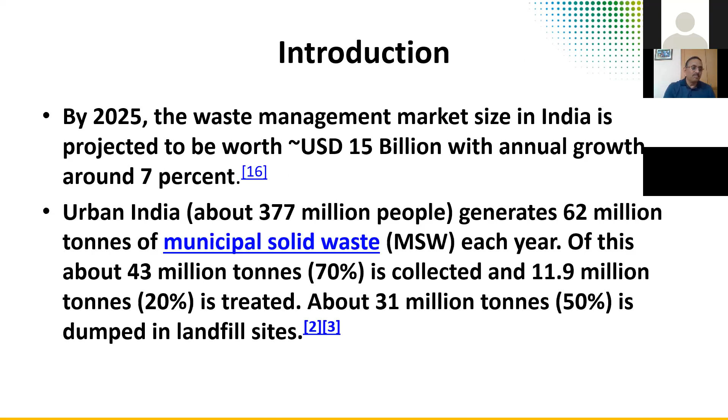Urban India, with about 37 crores or 377 million population, generates 62 million tons of municipal solid waste (MSW). Of this, about 43 million tons is collected and only 11.9 million tons is treated, meaning the balance of 19 million tons is left on the roads. Even of the collected waste, only 20% is being treated now, and about 31 million tons is dumped in landfill sites. This is a very alarming number for all of us to ponder today.

It is estimated that India generated almost 2 million tons of e-waste - I'm talking about e-waste, which is educated people's waste - in 2016, approximately 1.5 kg per capita. This is going to exceed other solid waste in urban areas. It's estimated that in 2020 it was 4.5 kg - we've grown threefold in e-waste in 4 years, so about 5 million tons of e-waste is going to be generated this year.

So do civil engineers have to know this topic? This is a question students always laugh at me about. I had 4 topics of summer internship to offer students, and I'll be sharing that today.

One is 'CLEAN' - Colony Level Environment Assessment and Neutralization, that's my acronym - and C&D waste management.

Another topic is function halls. We all attend functions, though not in the last 4 months, and maybe not for another 4 months. But if you've had any experience attending functions anywhere, you can see the condition starting from parking and fire hazards, to solid waste management and sewage, because they don't provide proper facilities. Suddenly there will be 1,000 people coming, eating, and generating a lot of waste, and function hall managements very rarely have treatment facilities at that point. So I thought I'd work on a startup idea of mobile treatment plants. I offered this topic to students, and they felt, what is this waste?

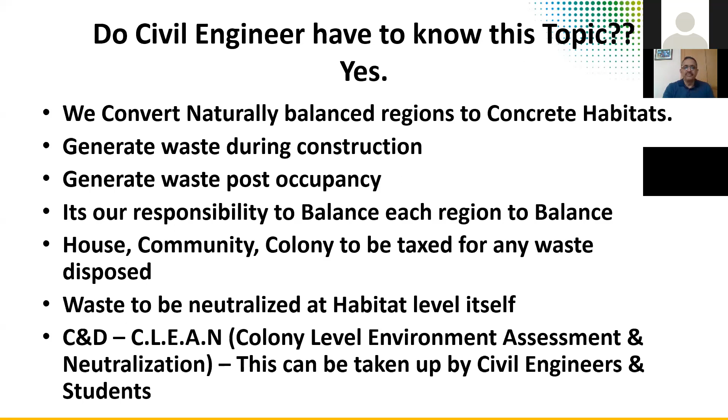So my concept is waste should be neutralized at habitat level. This is my pure concept. I'm working on it. I need students, I need researchers to work on these ideas which we have on construction and demolition waste, and clean, that is colony level environment assessment and neutralization. And this can be taken up by civil engineers, and a lot of startups can happen by civil engineers in this waste management.

Imagine the plight of the people living in this, and I am very sorry for this. And the next level is we dispose all this sewage into the canals, rivers, nalas, untreated. And then we spend huge money. Hyderabad city itself has a budget plan of about 20,000 crores to do city level sewage treatment. We were dumping sewage into Hussain Sagar Lake, and then we are spending huge money to treat this sewage before dumping. And we design huge projects, spending thousands of crores.

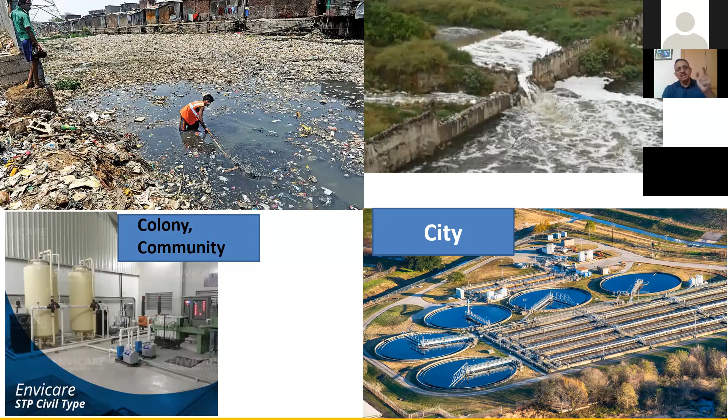We dump everything as solid waste, and we complain the municipality is not collecting my waste. Are you paying any special tax for additional waste that you are generating? Why don't the government come up with a legislation that taxes every waste collected? It should be more than the buying itself. Then only will people think twice, just like when they charge you for the plastic polythene bag you buy at the hypermart or provision store. Same way, waste also, when you dispose it, should be taxed. This is my proposal to the government.

Solid waste management is also like this. We are going for landfills instead of collecting in an organized manner. At least, if not so much classification, we can segregate dry waste - paper, glass, plastic, and metal - and wet waste, biologically degradable organic waste, which in layman's language is wet waste.

And then you can recycle at the colony level itself - why do you need vans for carrying all this? You can treat it there. Imagine the data on every municipal corporation or panchayat spending every month on transportation of this solid waste, whereas this can be treated at plasma gasification plants, pyrolysis, and biomethanization. For power generation you can use it, and inert waste can be taken to the crusher to make cakes for reuse. All this is possible actually.

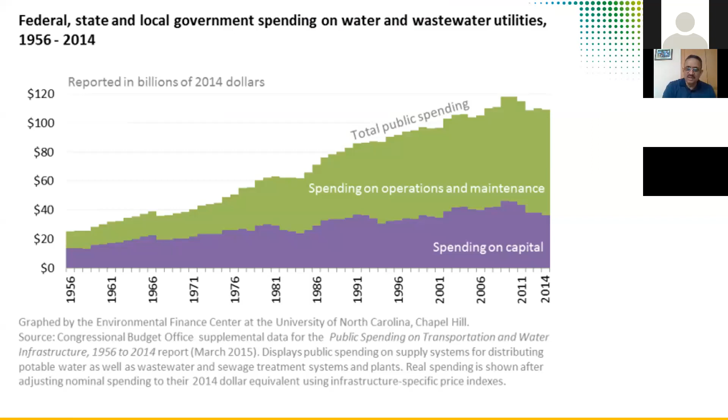We have to think about it and see whether we want to spare some 2% of our individual home or community level land to manage this waste locally, or we will be continuously killing - in other words, in future, the waste will be dumped on our heads. So this is the theme of my talk today.

Of course, we also learn the treatment methods and all, but treat and zero disposal - that is ideal but also sustainable. Ideal meaning it is difficult, but we should be attempting to reach the zero disposal stage in the design of every individual home, community, colony or layout. And it is a culture actually - waste management is a culture, and it is a commitment of engineers, and needs a legal framework to enforce it. So we all can work for it.

Otherwise, we are seeing the pandemics. Imagine living near those sewage rivers and sewage canals and landfills in Hyderabad. Many people should know Jawahar Nagar, which is a landfill area - acres of land, 20 acres, 30 acres, being filled. Disasters with population growth and urbanization.

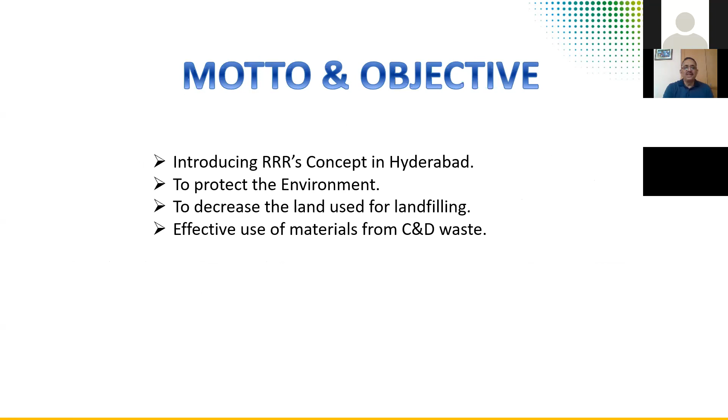So this is our awareness as engineers - this is the C&D waste management project. I got it done by a student to protect the environment, to decrease the land used for landfilling, effective use of materials from C&D waste, and building roads and bridges construction.

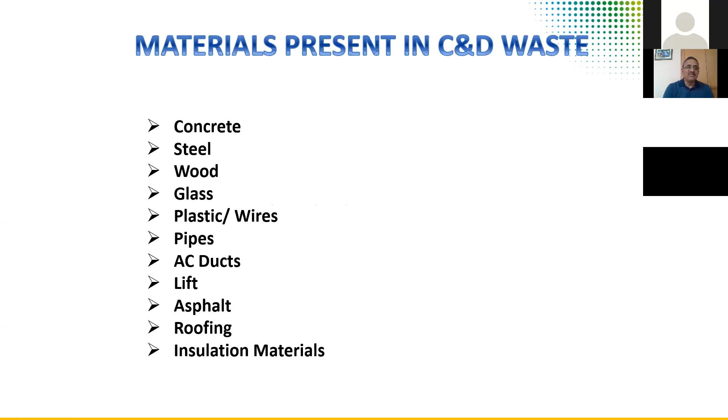We are seeing how much waste, demolition waste, is generated from removal of existing structures built over a range of time periods - old structures. Site clearance also comes under construction and demolition waste, along with excavated soils. Materials present in C&D, mainly from demolition, include concrete, steel, wood, glass, plastic, wires, AC ducts, lifts, asphalt, roofing, and insulation materials, etc.

So we should have the strategy of avoiding and minimizing waste, recycling it, or treating it, and finally disposing only the minimum amount.

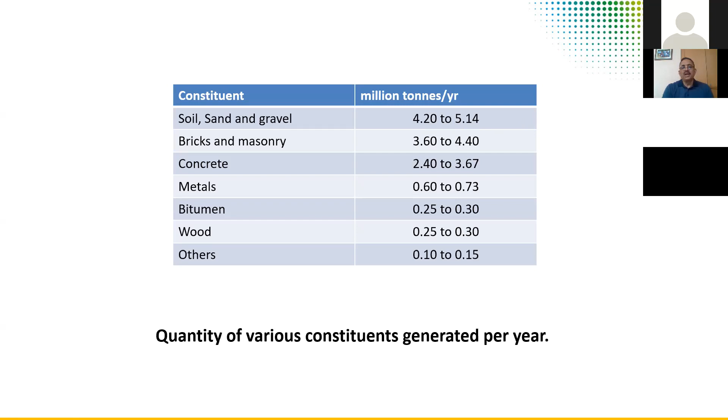Soil, sand, and gravel generated in Hyderabad is about 4.2 million tons per year. Bricks and masonry is 3.6, concrete is 2.4 million. Metals like steel and window frames are 0.6 million. Bitumen is 0.25 million, wood is 0.25 million tons, and others are 0.1 million. This is the breakup of C&D waste generated.

Different constituents, percentage-wise, show concrete as a major component, and brick masonry is also major - together making up 50%. Soil and sand can be reused for subgrade filling of roads, so we won't discuss that further. About 55% can be recycled or reused in various applications.

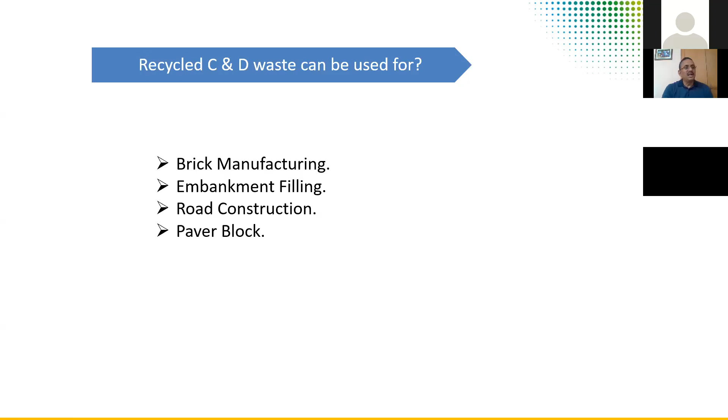A study was done proposing C&D waste recycling plants, where waste can be converted into aggregates or mortars and reused. Applications include brick manufacturing, embankment filling, road construction, or paver blocks. Door frames can be reused, brick concrete can be recycled on site as fill sub-base material, and paint can be remixed and used in garages or storage areas.

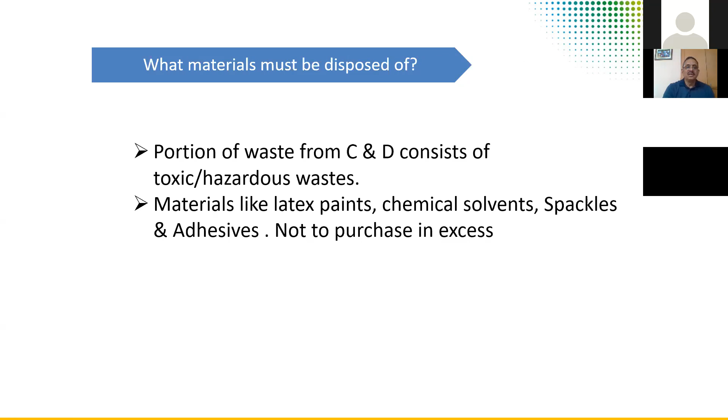A portion of waste from C&D consists of toxic hazardous materials like latex paints, chemical solvents, and spackles - these should not be purchased in excess. They can be reused, recycled, used as replacement for sand and cement as per code, for filling, and are cheaper to buy.

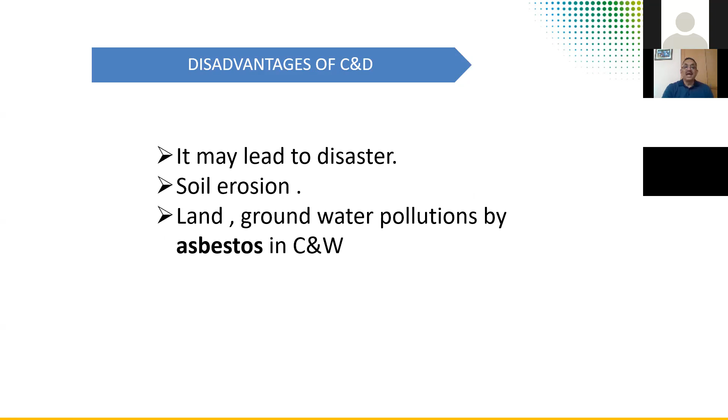Otherwise, it may lead to disaster - soil erosion, land and ground water pollution by asbestos in C&D waste is quite possible. We need recycling plants, awareness programs, code approval, a ban on landfilling, and encouragement of recycled materials in the market, as this is also part of the green norm.

If you have recycled content - for example, Armstrong - it was a surprise to me about 15 years back when I learned that Armstrong false ceiling material uses recycled content. It looks so good and is such a great brand. Any material we buy in construction, we should check the recycled content in it.

Construction waste disposal should be included in the EIA. So they did a survey with about 20 interns and 3 core members, covering zones like Uppal, LB Nagar, Bachupally, Mehdipatnam, and Kukatpally, surveying demolition buildings, building types, and so on.

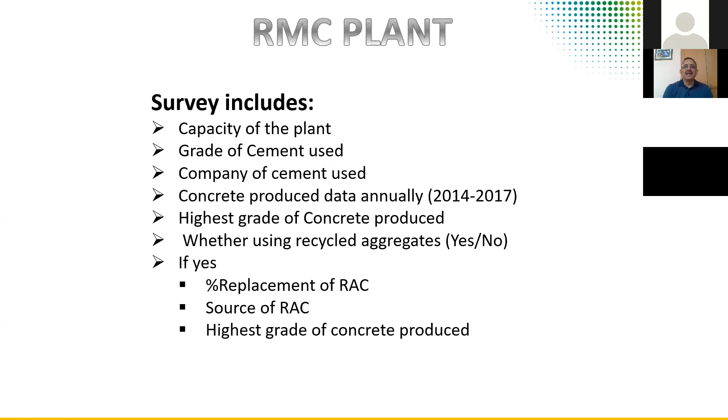We did the survey - concrete produced data annually from 14 to 17. They visited 40 contractors, 250 C&D sites, 40 construction sites, and 250 demolition sites. They also visited 27 RMC plants and collected data - plinth area of demolition is about 90,000 square feet, and average area of construction is 700.

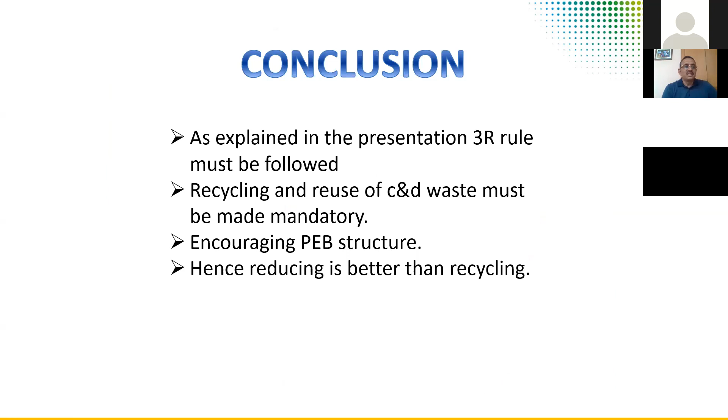They worked out how to balance construction materials from demolition materials - it's a very interesting study. These are all the demolitions they have done. A 3R rule must be followed: reduce, recycle, and reuse. Encouraging pre-engineered structures like precast and steel structures will drastically reduce waste during construction.

That's in developed countries. In India, about 61,000 MLD of wastewater is generated daily, of which Hyderabad alone generates 1,100 MLD, disposed into the Musi River, out of which only 750 MLD is treated. That means we are disposing 350 MLD of sewage into rivers, lakes, and so on. This requires a lot of work by engineers and students to bring awareness about this.

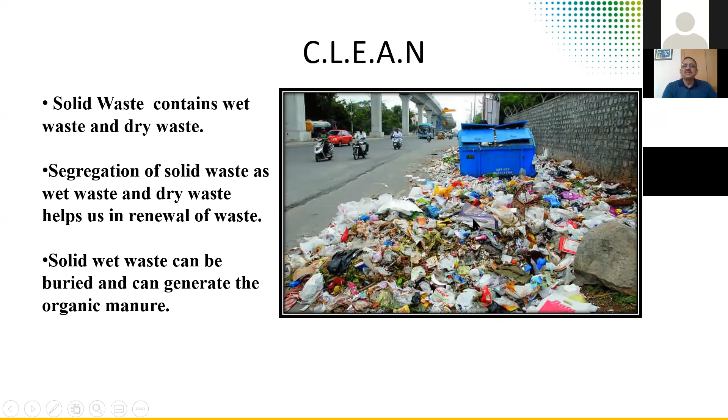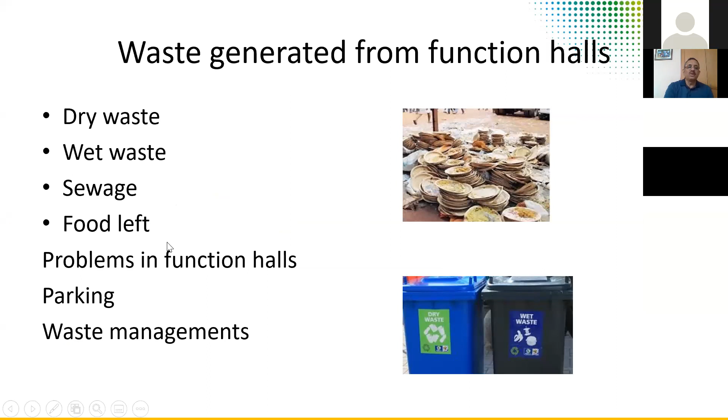Next is the function halls. As I said, this is the third internship program they have done, and they collected data from the function halls on solid waste, wet waste, dry waste, and food left, and surveyed all this.

Why I'm telling you this is most of you should encourage students to work in every city in India on this local level waste management. In fact, by doing this, civil engineers will be branded as responsible citizens. So we should do this, and we get to know the quantity of waste.

And this is the proposal: a mobile waste digester sewage system, a mobile organic waste management system, and a parking solution. These are the three solutions they have come up with for function halls, based on what they studied.

So as a company, as a consultant, in my opinion, let's not think that the job of sewage treatment is somebody else's job, or effluent treatment is somebody else's job. As consultants, as civil engineers, we should know about these processes available, about the methods of treatment possible for every project we do, and then try to implement this system.

In Tamil Nadu, we did a project, as I said, a combined effluent treatment plant, and almost every industrial project, about 100 projects, we did the design of ETPs. And in residential projects, even a 50-flat project, we implemented STP and solid waste management.

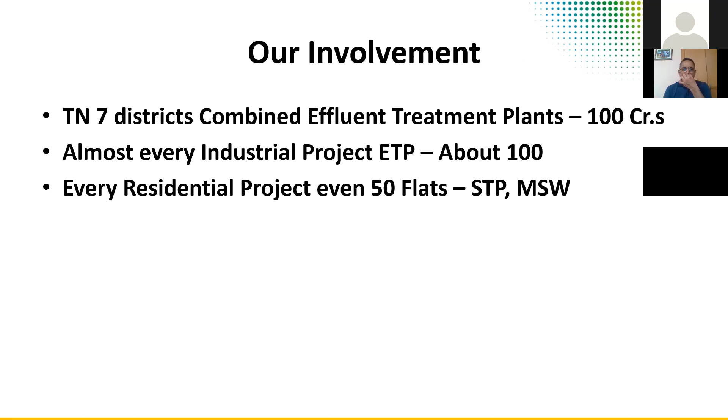That means almost 60% of the water we use, out of the 150 or 200 liters per capita per day, is used for flushing, landscaping, and such applications, so you can use recycled water for that. This reduces that much disposal into the sewer lines, the main sewer lines.

And the waste management collection - now we are into the real topic of management. We have to plan the collection of waste, whether it's sewage or solid waste, then transportation of the waste, and then treatment of the waste.

For collection, there are various methods like combined collection of wet and dry waste. It's always better - in fact Hyderabad, Greater Hyderabad Corporation is encouraging segregation at the source level itself. That is a must, otherwise we'll be spending huge amounts on transportation and all that.

Once you segregate, you can convert your own wet waste into organic manure. You create a small pit at your home, keep dumping your organic waste, and once a month you get manure to use for terrace gardening. This reduces that much disposal.

And that is the most hazardous - organic waste generates a lot of mosquitoes and a lot of bacterial infections. So it is always better to treat it at the house level itself.

Next is the transportation. There are different methods of transportation: pressurized transportation of sewage, vacuum methods. Then treatment - we have pre-treatment, preliminary treatment, primary treatment, secondary treatment, and sludge disposal methods, biosolids.

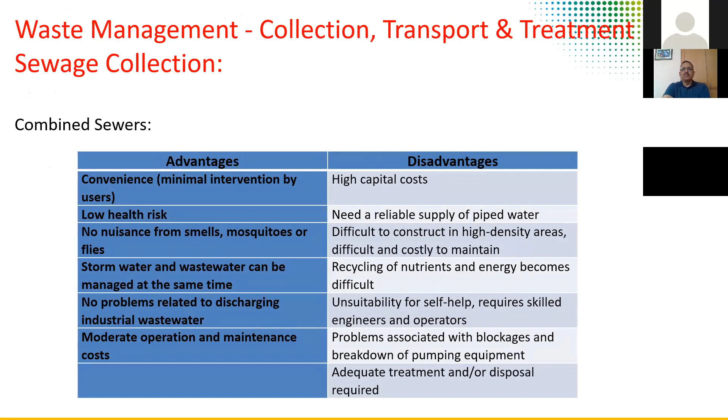So separate sewers are designed to convey wastewater and stormwater in separate pipes. This is always better, in fact I suggest this - I covered this in the water topic too. At every house level, you collect your terrace water and store it so you don't dispose it into the storm drain. What we are doing currently is combining stormwater and sewage, and treating all that volume together.

So it's very important that you can retrofit these colonies and educate the colony people about the advantages of collecting water at the colony level, and treatment of sewage at the colony level.

So sanitary sewer systems may also collect wet weather flow via illicit connections - this is a problem from house drains or storm sewers, as well as through defects in pipes and manholes. This is a big problem we have to solve. There's a huge requirement to audit these stormwater lines and sewer lines, and we should suggest methods to restore them to the proper system.

Surface runoff, grey water and black water can be managed separately, with limited or no risk of sewage overflow. This should be minimized. Once you plan at the house level, compact STPs are available, even 1,000 liter capacity sewage STPs, so you can buy and install at your home and not dispose any sewage out.

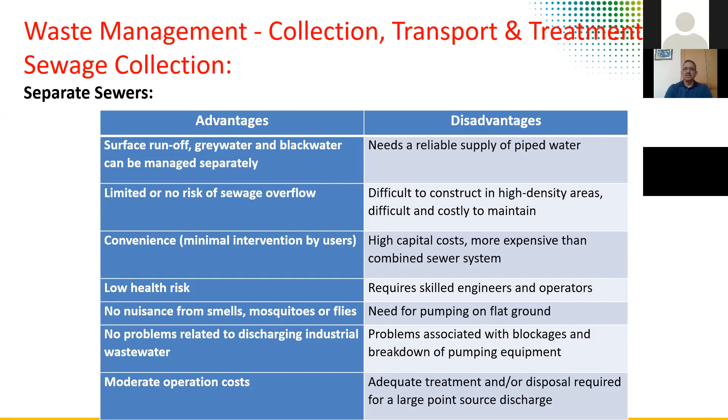When designing an individual house, also encourage them to have an STP and stormwater collection, and it will be a very sustainable house, with low health risk and no nuisance from smell, mosquitoes and flies, no problems related to discharging industrial wastewater, and moderate operation cost. These are the advantages of separate sewers.

Pressurized sewers, we are pumping the waste instead of using gravity to transport wastewater. This is another waste actually. Waste disposal itself is an unnecessary cost. We can minimize it, but again you pump it, you spend energy for it. So it's very negative actually.

The system can be built with only shallow trenches and relatively small diameter pipes. It is an effective solution where conventional systems are impractical, such as hilly areas and rising slopes. But we always have to plan gravity sewers, that is always better. Pressurized sewers, for effective wastewater transportation, need expert design, a permanent energy source for pumps and sludge pumps, and have high capital cost and require skilled engineering operations.

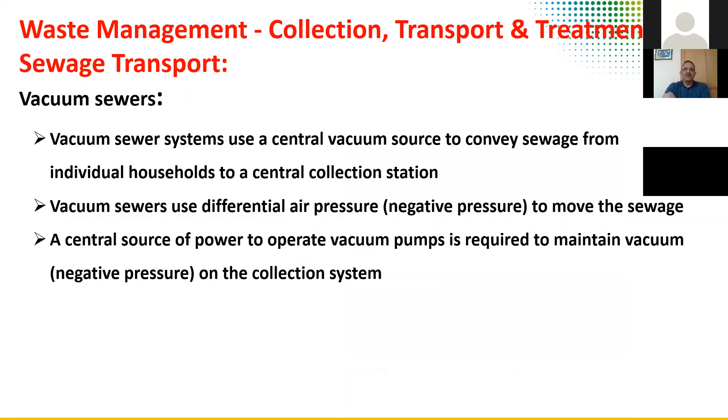Vacuum sewers are much more costly, they convey sewage from individual households to a central collection station. This is a very costly affair, requiring expert design and very high capital cost. We should not even think of this in Indian conditions.

For sewage treatment, we have effluent treatment and solid waste and hazardous waste treatment. We have anaerobic systems and aerobic systems, activated sludge process, which we all studied already. I don't want to spend much time explaining, but we should know about the moving bed biofilm reactor, MBBR technology, sequential batch reactor, and fluidized aerobic bioreactors.

MBBR technology has the advantage of less equalization and fewer chambers. Activated sludge is a conventional technology where we need to use ponds, oxidation ponds and all that. Fluidized aerobic reactors can go up to 200 KLD, for smaller capacities you can use this, and rotating biological contactors are very small units, you can do FRP with FRP containers and the least number of chambers.

In anaerobic systems, you have biodigesters with no pump rooms, least power, and you only pump the treated water, this is DRDO patented. We should use this at individual community levels. Biosanitizers are bacterial based, these are very advanced systems, this is biotechnology, you can develop bacteria that can neutralize your waste.

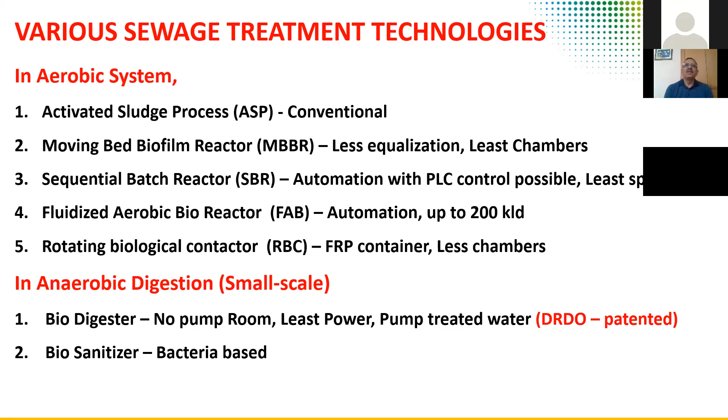These are all possible things, and we are building 700 MLD capacity sewage treatment plants in the city. So we have the bar screen chamber, oil grease trap. We should know the components: equalization tank, activated sludge processor, aeration tank, then the sludge holding tank where we remove and hold the sludge, and the settling tank, filtered water tank, and treated water tank. This is the process block diagram.

Regarding nature of waste, general quality of sewage inlet characteristics: say 300, that means 3 lakh liters per day, for example, and pH value is 7.5 to 8.5. We should always collect data on input waste characteristics, because our design basis depends on the input characteristics of the sewage, and then we target the output characteristics and design the sewage treatment accordingly.

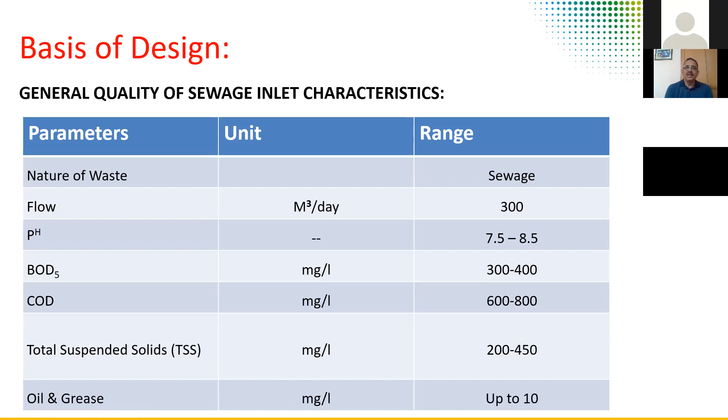BOD5 is 300 to 400, COD is 600 to 800, and total suspended solids is 200 to 450, oil and grease is up to 10. The targeted quality of treated water is pH 6.5 to 7.5, BOD should be less than 10, COD less than 100, suspended solids less than 50, oil and grease less than 5, and reuse is the parameter - we should be able to reuse the treated water.

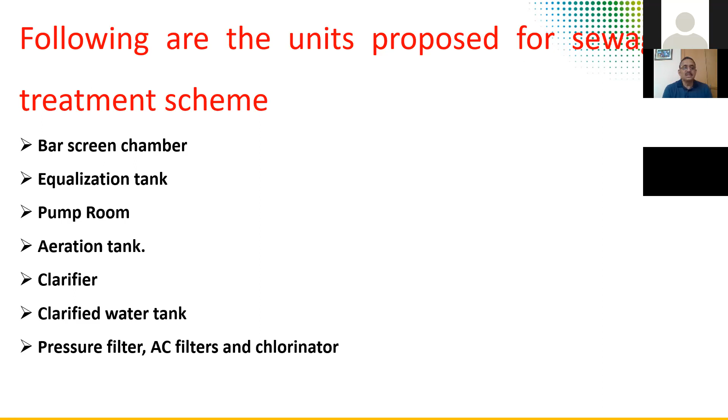For this, you can have a bar screen chamber, equalization tank, pump room, aeration tank, clarifier, and clarified water tank, and pressurized pressure filters. You can have pressure filters or sand filters, the old conventional method was sand filters, but now we are using pressurized filters and chlorinators.

Final tank, sludge holding tank, piping and cabling, and unit design. The important wastewater contaminants are suspended solids, biodegradable organic waste, pathogens, nutrients, and refractory organics.

So biochemical oxygen demand and chemical oxygen demand, and total suspended solids and pH. BOD is an important measure of water. It is a measure of the amount of oxygen needed by bacteria and other organisms. That's why we see the oxidation ponds.

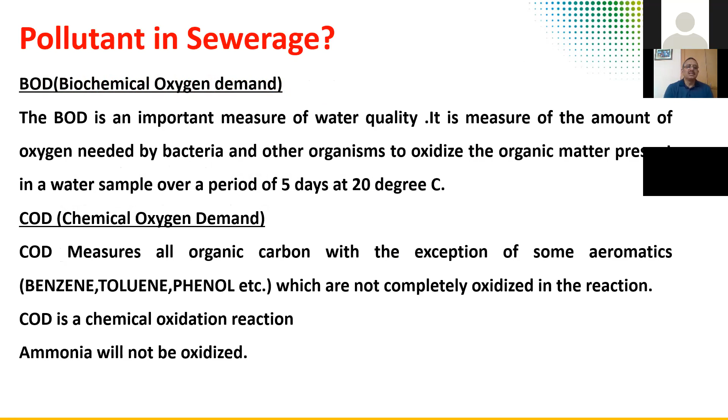And COD is organic carbon, with the exception of some benzene and others which are not completely oxidized in the reaction. So COD is a chemical oxidation reaction, and ammonia we cannot oxidize.

That's why, in a good design, you should not allow detergents to be used in bathrooms or mixed into the sewage. Otherwise the treatment will be very difficult and you cannot get good quality water. What should be done is you should encourage the community to wash separately, then treat or dispose of that water separately so that the other sewage can be treated.

In developed countries, even 20 years back, I have seen it is a compulsion actually. Nobody can dispose detergent water into the normal sewage. So this is a very important point every engineer should note and try to implement in their projects.

So standards of treated sewage, raw sewage and treated sewage, after secondary treatment and after tertiary treatment. And oil, grease, after secondary treatment - public sewer level pH is 5.5 to 9.

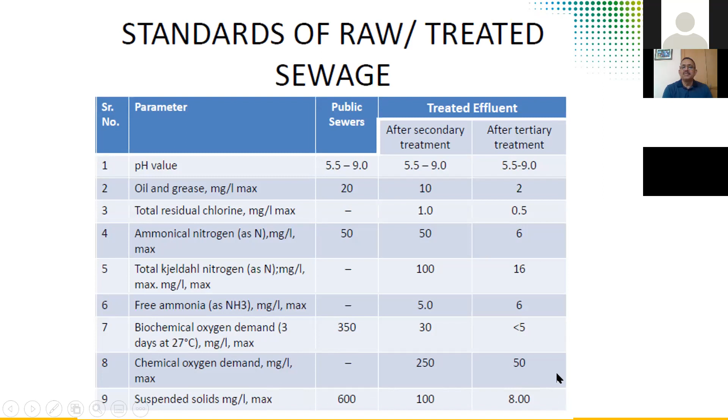Oil and grease is 20. Ammonical nitrogen is 50. Biochemical oxygen demand, BOD, is 350. Suspended solids is 600. And after tertiary treatment, it will be brought down to 8. These are the parameters.

In screening, you have removal of coarse solids, and types of screens are fine, medium, and coarse, with cleaning done manually or mechanically. The benefit is protection of pumps by screening. Coarse screening is 20mm clear spacing in bars, and fine screening is 6mm.

In aerobic, we have MBBR and SBR systems. In anaerobic sewage treatment, in the absence of oxygen, no aerator blowers are required, but there is foul smell during the treatment. So these are all the activated sludge process, a very conventional method.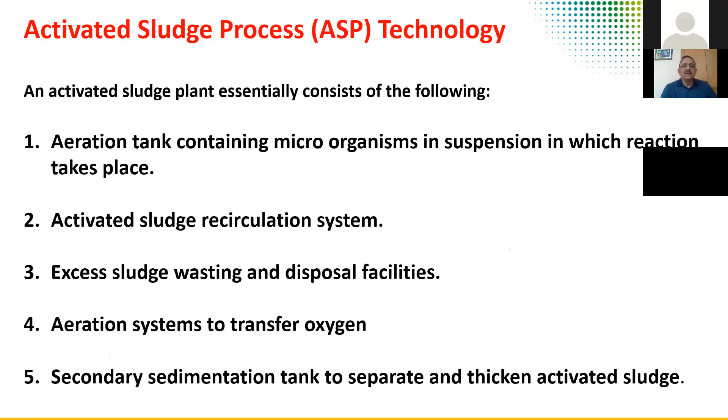Advantages are seasonal variations can be sustained. Disadvantages are high energy consumption, foaming will be there, and it requires elaborate sludge digestion and more land than SBR and MBBR. Nitrogen and phosphorus removal requires additional anoxic tanks and three times internal recirculation.

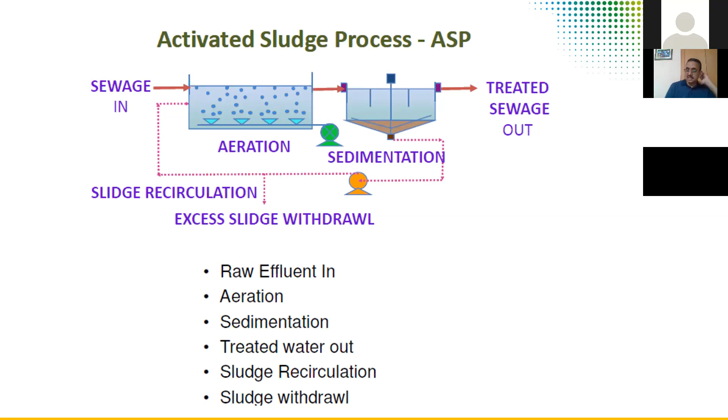So this is the aeration and sedimentation process. It's simple, but it requires a huge area for aeration tanks, large aeration tank. So this is the process for ASP.

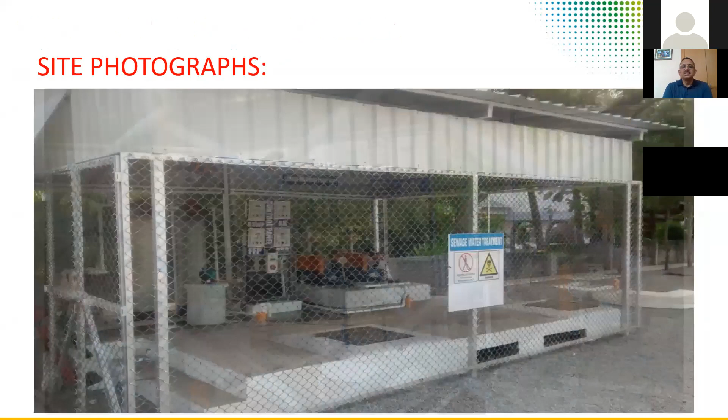And these are the drawings for activated sludge process, where large tanks will be required. This is like conventional septic tanks almost. And these are photographs of compact units, with site photographs of these compact units as well.

So in MBBR, we have this based on the biofilm organized and developed on carrier elements. The media is floating in the aeration tank and kept floating by air diffusers. So this is the flow diagram.

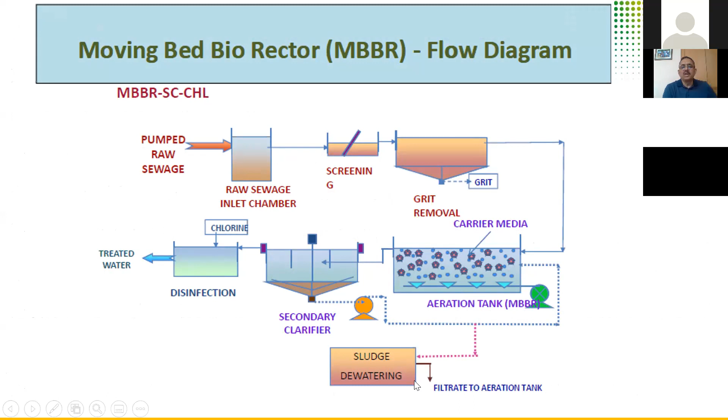We have raw sewage screening and grit removal, which is common. Then we have the aeration tanks where you have the carrier media which will be digesting, and then the secondary clarifier, disinfection, and treated water sent out, with sludge dewatering and sludge cakes taken out. So this is the drawing of one proposed project we did.

MBBR technology - and this is the maintenance and operating area. This is all what we do. We think civil engineers have to do only this structure, but we have to do engineering of the waste also, actually. We can do wonders if we apply our mind, if we apply our knowledge - definitely we can do wonders.

So let us involve, don't leave it to the vendors, because vendors try to sell their technology. We should know the advantages and optimization of various technologies for our given project. It is not a common characteristic of all the waste in every project we do - for an office building it is different, for residential it is different, commercial it is different. So we have to prepare the design basis report for each of these characters, and for the targeted one, only spend on the required technology.

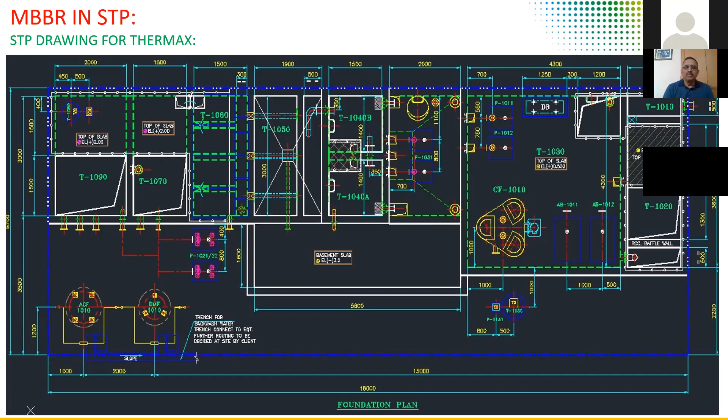So this is from another vendor, the technology of MBBR. This is the drawing for the process for the given capacity and characteristics. These are photographs of different implemented projects. We should try to make this very clean and environmentally friendly. This is a most neglected area, but we should keep it proper.

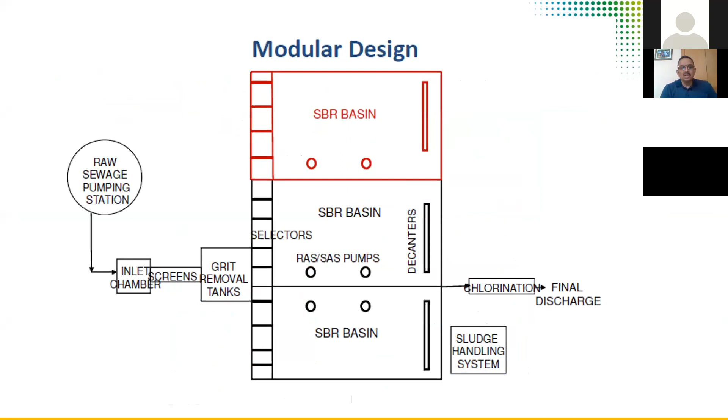And a sequential batch reactor, this is SBR technology, and de-gritted sewage is fed into the SBR basins for biological treatment to remove BOD, COD, and suspended solids. So this is the SBR technology, we use this technology also, and this is the SBR process.

Fill and start aeration, then stop aeration, then start settling, then start decanting, then stop decanting and send it for recycling. So it can be fully automatic in SBR, a cyclic activated sludge process until you achieve the targeted result, and it can be compact because you don't have to spread the whole thing.

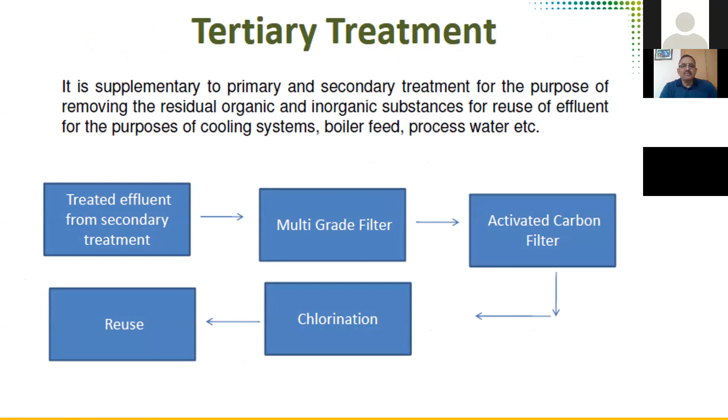So we have multi-grade filters, activated carbon filters, chlorination, and reuse. Next is the aerobic bioreactors, fluidized aerobic bioreactors, FAB technology.

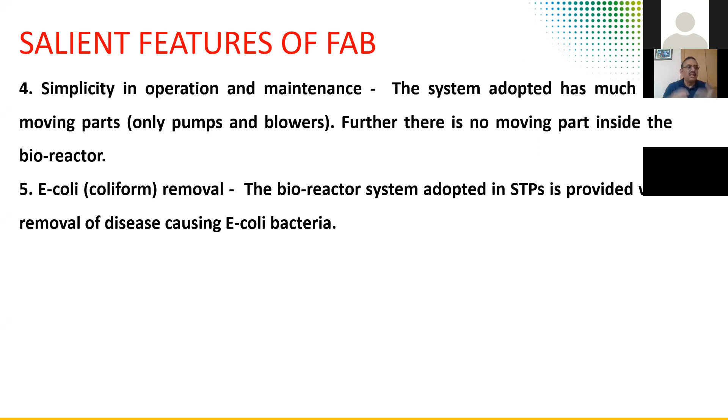We should know about this and compare whenever we suggest any technology - first its capacity, space, and value engineering we have to do. What is its capacity and what is the space required? What is the cost, what is the operating cost? We have to evaluate the overall cost and visit some installed plants of the vendor, assess the vendor, and then only suggest the proposed treatment.

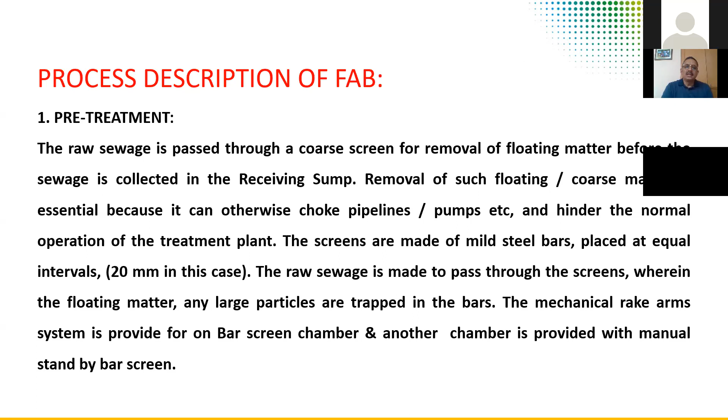So the process description is: pre-treatment, biological treatment, and tertiary treatment. In pre-treatment we remove matter - raw sewage is passed through coarse screen chambers and floating matter is removed, and then sent for biological treatment, and then tertiary treatment finally.

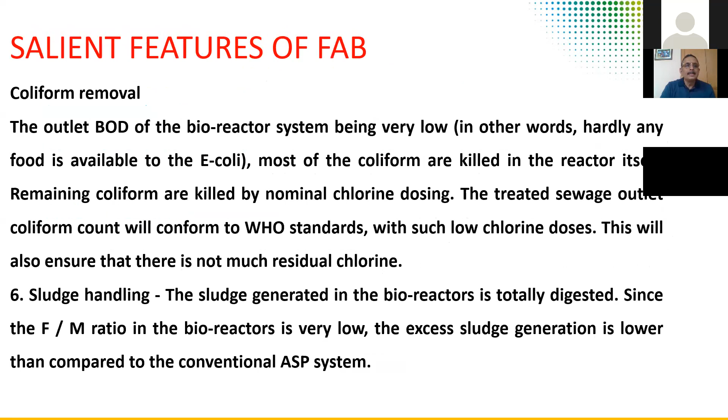And advantages of this - sorry, we missed something. Yeah, these are the salient features of FAB technology: small space requirement, compact units, but it has a limitation of 200 KLD. That means small communities can use this, not for large city level treatment plants.

So this is the FAB technology, and we have this rotating biological contactor, an inbuilt complete single packaged unit. This is for house level, small units, very less noise and no stinking. Because it's a compact unit, the entire package can be transported. It can be used for up to 500 liters or 1000 liters capacity, and you can move it - the system can be easily upgraded from one capacity to another by adding compact units, and it has low operation and maintenance cost.

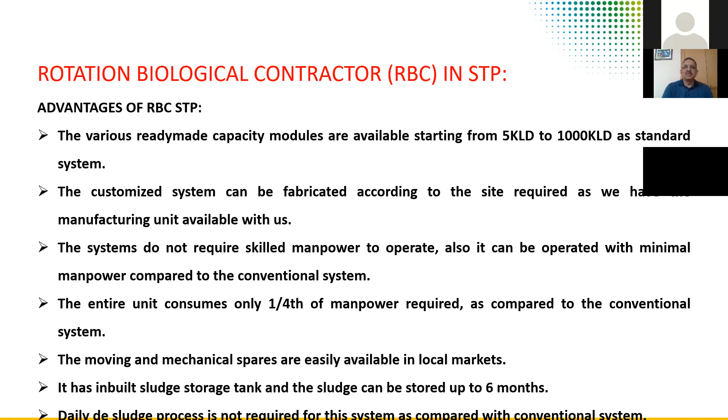And it can be in FRP tanks, with ready-made capacity modules - 5 KLD, as low as 5,000 liters, up to 1,000 KLD, which is 1 million liters, 1 MLD. So even a small 5,000 liters we can use for this RBC technology. This is the latest small unit available in the market, and it will have a secondary clarifier.

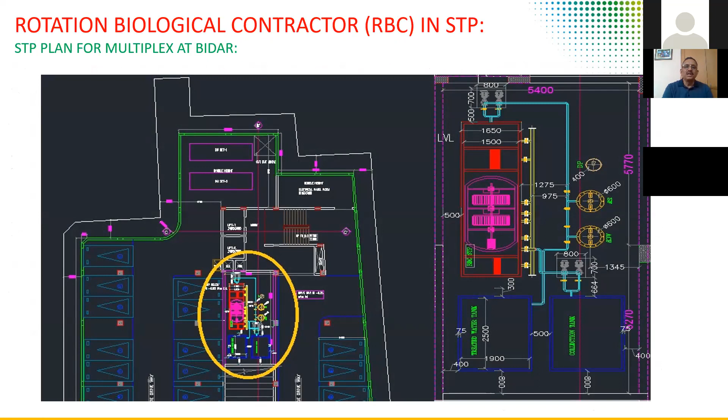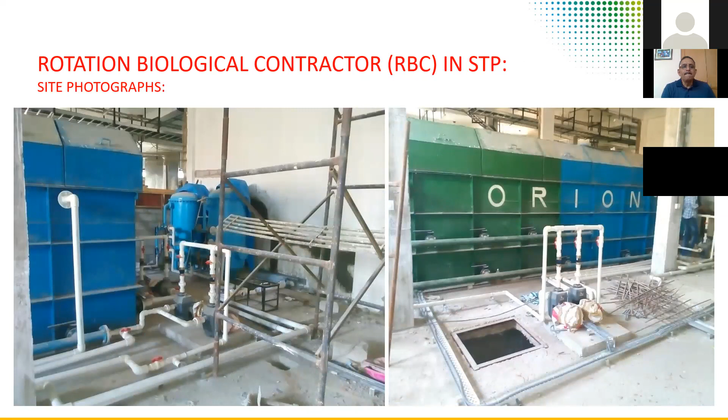We designed this small RBC unit in a multiplex theater - size is 2.5 meters by 1.7 meters and 5.5 meters. This is the photograph of the installed RBC, very clean and simple. So these are photographs of RBC. We should encourage these small units in small communities.

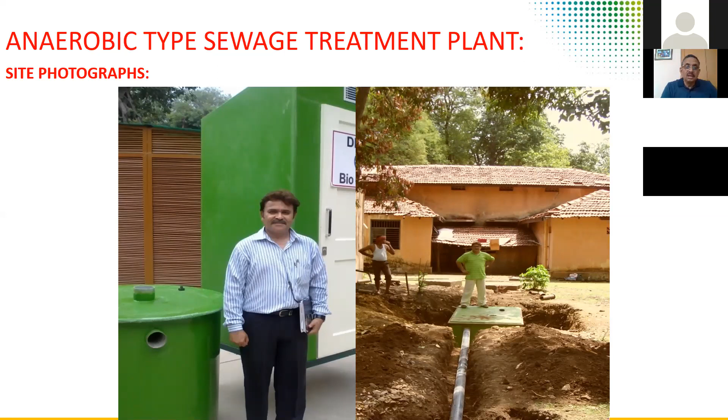And this is a biodigester, an anaerobic type sewage treatment plant. This is DRDO technology, being used for toilets in Swachh Bharat Abhiyan, at the toilet level. Biodigesters are very local, used at every level, and no power is required and almost no maintenance.

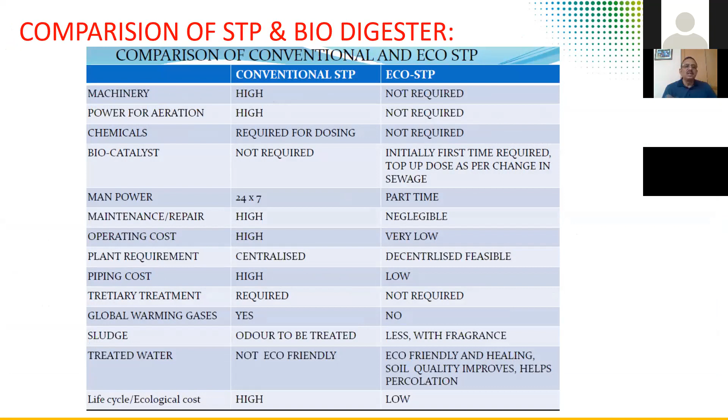So no machinery and power for aeration is required, and chemicals and biocatalyst are not required. Initially it is required the first time because you have to initiate it, but the only thing is it has to be continuous - these biodigesters cannot be stopped and restarted after 2 days. So you should plan such that it will not be stopped.

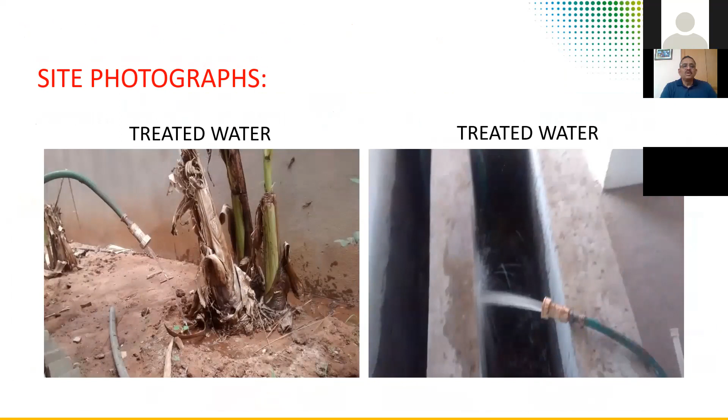Once it is stopped, you have to feed it again, like after antibiotics we use this powder. So the treated water can be used for plantation and recycling, and these are photographs of the biodigester systems.

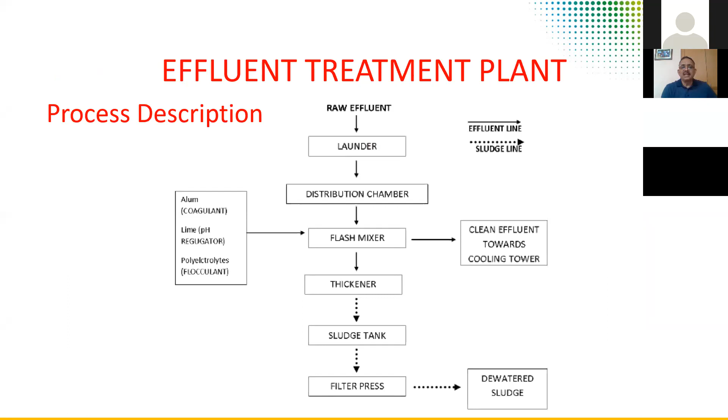Next is the effluent treatment plant. There is huge work here, many slides to cover. We all know industrial wastewater. Depending on the process generating it, we have to collect the characteristics of the raw effluent and plan the treatment and distribution chambers, flash mixers, thickeners, sludge tank, and filter press. These are all the processes.

I'll run a bit fast. So we have pre-treatment with fat and grease removal, primary treatment, secondary treatment, tertiary treatment, activated sludge, and treatment methods like physical unit operations, screening, flow equalization, sedimentation, aeration, pH control, and chemical coagulation. pH control is very important in effluent because it can be highly acidic or basic.

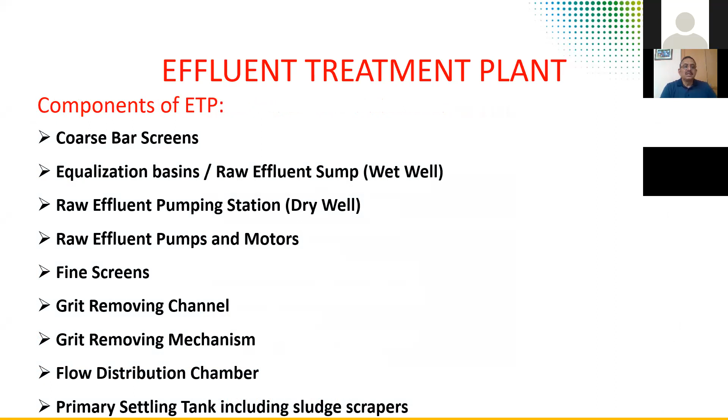So we have coarse bar screens, equalization basins, raw effluent pumping stations, and components of the ETP include primary sludge sumps, primary sludge pumping stations, secondary settling tanks, secondary sludge pumps, and raw effluent pumping.

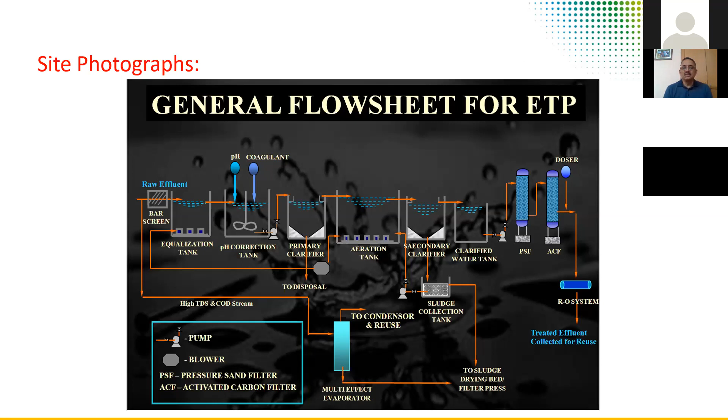There will be so many steps. We have to study these technologies for various processes, estimate the civil cost and the process cost. Some vendors' capital equipment may be lower cost, but the civil cost will be higher. So we have to take the data, work out the overall cost of installation, and only then recommend a particular vendor.

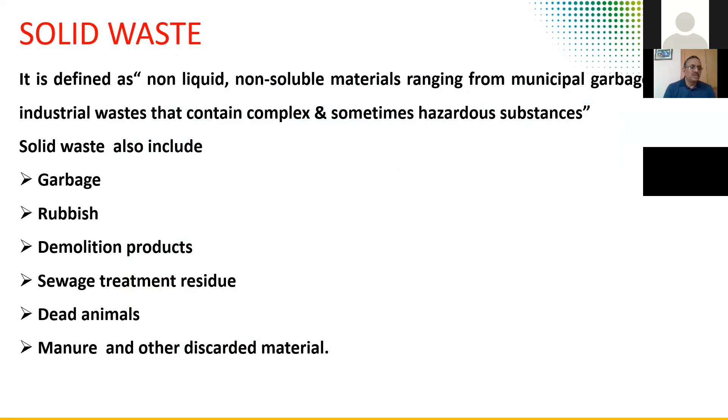Next is solid waste management: non-liquid, non-soluble materials ranging from municipal garbage to industrial waste. There is rubbish and dead animals also. It's a very tough job actually, handling garbage management.

In solid waste management, the first and foremost thing is segregation at the source: dry waste into 4 categories and wet waste separately. So we have municipal solid waste, hazardous waste, industrial waste, agricultural waste, and biomedical waste minimization. Municipal solid waste includes household waste and construction and demolition waste.

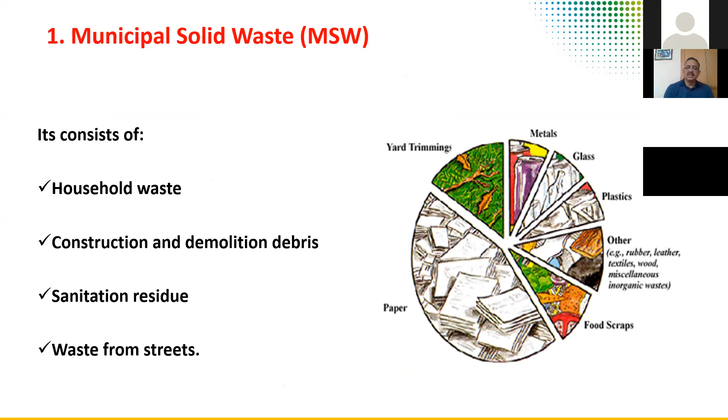Sewage is different, effluent is different. Effluent will be more chemical actually, so it cannot be combined with these. The process is different. There's also C&D waste, sanitation residues, and waste from streets, which includes biomass as well.

If you classify municipal solid waste, you have paper and paperboard, a very large share which can be recycled, and yard waste like lawns and soil. You have metals at 7.7%, plastics at 9.4%, and food waste, which is wet waste that can be digested, at 10.4%. Based on this, you can plan for glass and wood, which can be recycled, and others make up 10%.

Plastics are often sent to landfill, but they can be reused. There are different technologies coming up now for recycling plastic. So you can minimize disposal to hardly 10% to 20%, with the rest recycled or digested. Municipal solid waste can be reduced drastically by understanding the character of the waste.

Hazardous waste has to be collected separately. There are vendors who collect this hazardous waste mostly from hospitals and industrial units, and it has to be treated separately - infectious or corrosive waste, ignitable waste, reactive waste, and chemical manufacturing waste, which come under the red category.

There are very dangerous effects of this hazardous waste. You can go for a DRDO system, biodegradable, with 5,000 liters per day capacity, FRP. These industrial wastes contain toxic waste actually.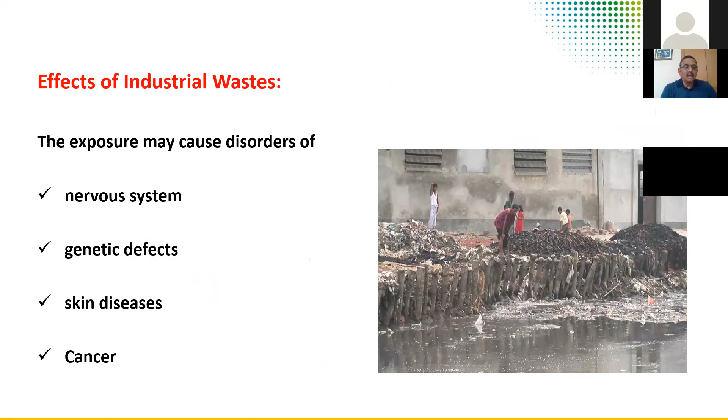Sugar, food processing, metallurgical, fertilizer plants and all - there will be skin diseases, genetic defects. We know the effects of fluorides, and cancer can be there too. So we have to recommend treatment at the source itself, whether it is solid waste or effluent.

Agricultural waste can be almost fully digested if treated properly, and livestock waste is also very dangerous. Waste to energy methods include gasification and pyrolysis. Please never think of thermal plants for this waste - that is more hazardous actually.

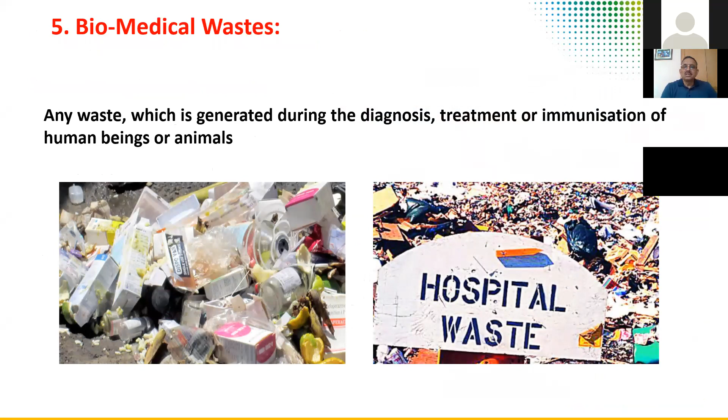Biogas production: animal waste, food processing waste, and other organic matter can be decomposed to produce gas, that is biogas. Biomedical waste is generated during diagnosis, treatment, or immunization of human beings. Hospital waste is hazardous, and biomedical waste cannot be mixed with other waste, so it has to be collected separately. You should check hospitals to see whether they are disposing their waste separately.

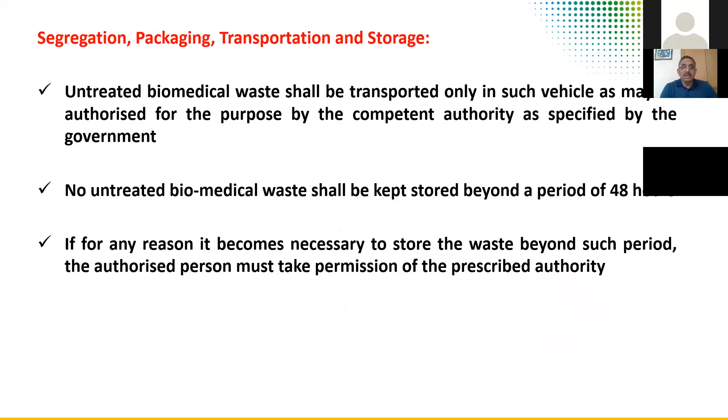No untreated biomedical waste shall be kept stored beyond a period of 48 hours. This is very important, you should be knowing. And waste minimization is achieved by adopting the reduction, reuse and recycling methods. That is the only way.

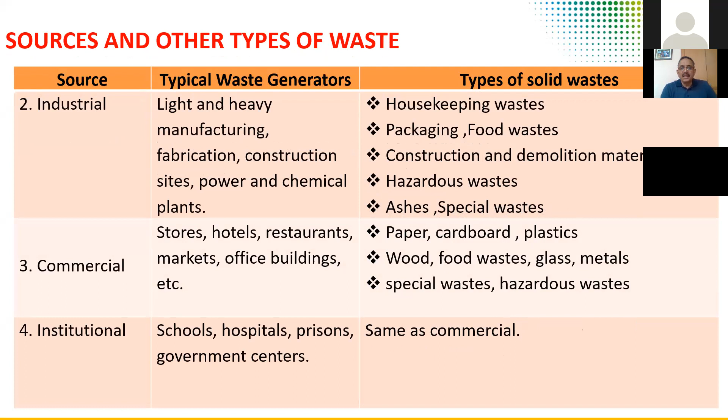In residential areas, mainly single and multi-family dwelling units, we have food waste, paper, cardboard, and plastic. We should encourage the old system of recycling, where people buy used containers and so on. And industrial waste includes light and heavy manufacturing, housekeeping waste and packaging of food waste, construction and demolition materials, and hazardous waste.

In construction and demolition waste, as I explained, you have wood, steel, concrete and dirt. Concrete and dirt, that is masonry waste, can be recycled and contributes almost 60% of C&D waste. 30% is from excavation, and that excavated soil can again be reused.

Municipal services include street sweeping, landscaping, and so on. And the process industry generates another type of industrial waste, scrap materials and off-specification products. So there is a huge scope for managing this waste, and we should all work on ideas to minimize and treat it locally.

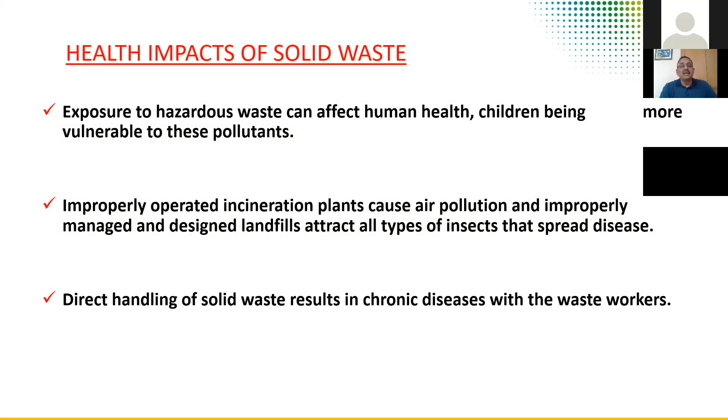Micro-level management of waste is much better than creating huge landfills and huge sewage or effluent treatment plants at the district and city level. So we should discourage that approach.

Incineration plants are used for this, and this is the landfill. We make huge landfills and do a lot of research on how to manage them, but it is very difficult. It was a very traditional method, and we should not encourage these landfill methods.

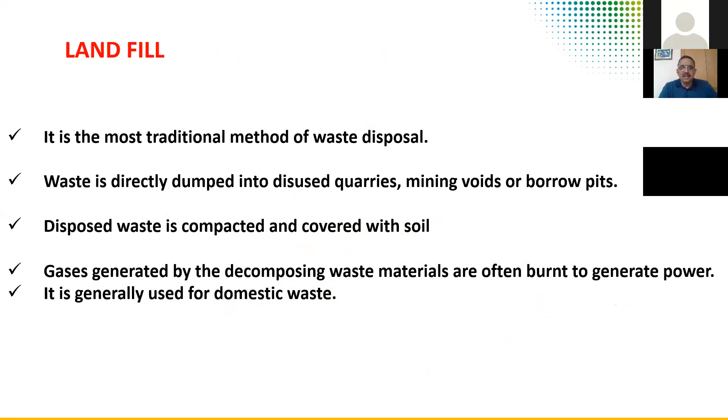The disadvantages include huge landfill collapses, as we have seen in Delhi recently, where some people died because of landfill collapses. Maintaining a landfill is a big challenge.

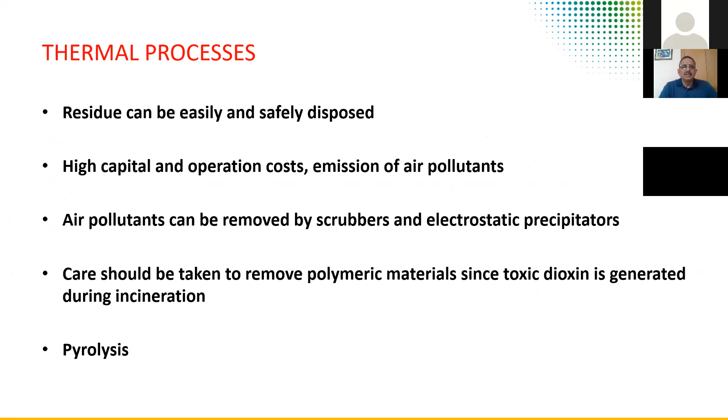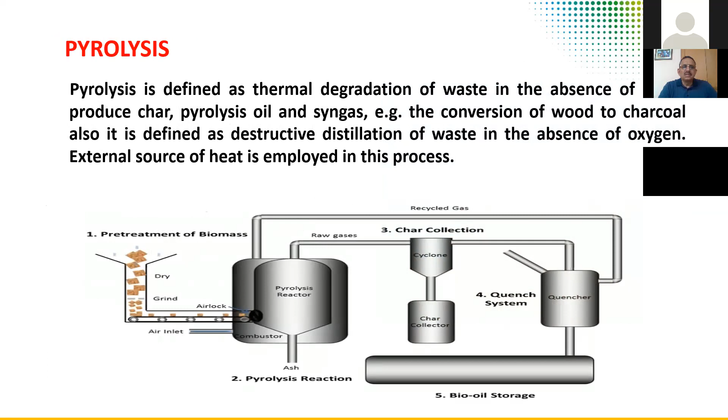The thermal process of incineration is adopted for biomedical hazardous waste, but it is expensive and uses a lot of energy. There's also compaction of landfills, pyrolysis of waste, and generation of gases for power generation.

Finally, reduce, reuse, recycle has to be followed in waste management. Buy products in bulk, larger economy size products, and avoid over-packaged goods, especially ones packed with several materials such as foil, paper, and plastic.

Avoid disposable goods such as paper plates, cups, napkins, and razors. Please underline this: don't use disposables, because that generates more solid waste. Buy durable goods at work, make two-sided copies, don't use plastic PET bottles for water, and use electronic mail.

Even 2-3 years back, when I attended a function in London, a banquet, they were supplying water only in glass bottles. Milk also we used to get in glass bottles, now we get it in polythene packets, which is very hazardous. At least you should recycle these things.

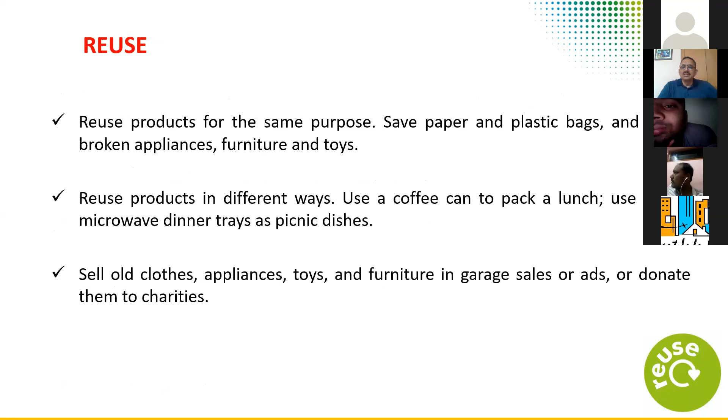Reuse products for the same purpose, and save paper and plastic bags. We have to reuse products in different ways, for example to pack a lunch. Use reusable containers rather than plastic wraps, use a ceramic coffee mug instead of paper cups, and reuse grocery bags or bring your own cloth bags.

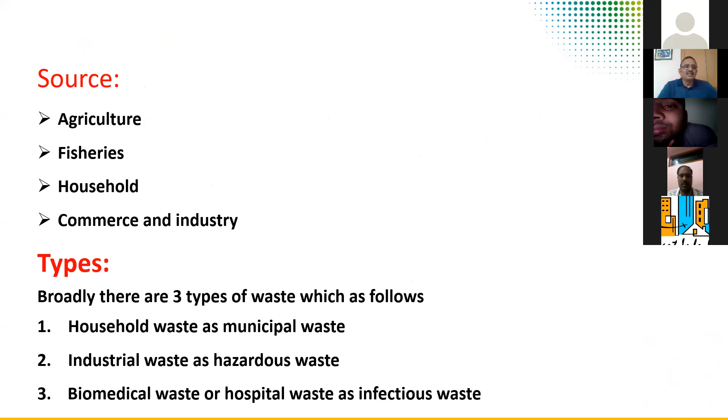Buy products made from recycled material, check collection centers, and recycle things. Consider economy, social and environmental factors, and intergenerational equity. This applies to agriculture, fisheries, household and municipal solid waste, and hospital or biomedical waste—use the same reduce, reuse and recycle technologies.

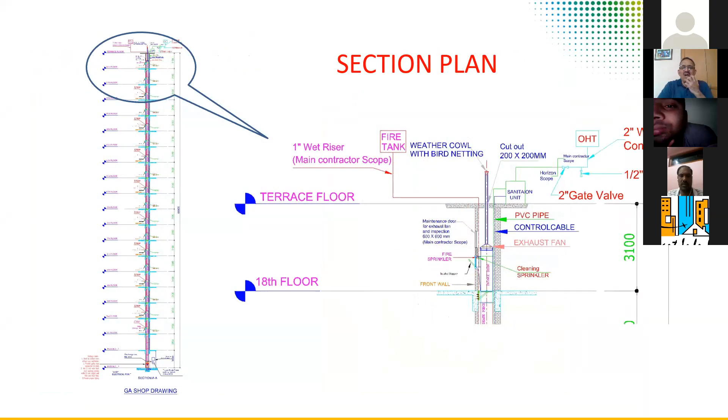Wet garbage and dry garbage, that is a very important distinction. Garbage bins and chutes also matter—you have to design garbage chutes in residential apartments and offices, with all the details of those chutes properly designed. So this covers waste management for today.

Suraj Shinde is asking about wastewater treatment. Yes, there is a huge demand, as we move forward responsibly, for wastewater treatment careers and management.

Any other questions?